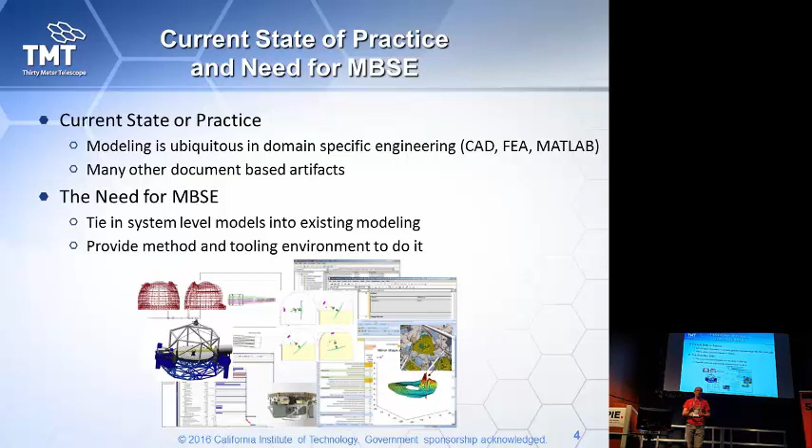Currently, and this has been going on for some years, on the discipline side we have models everywhere, all over the place, for CAD, FEA, MATLAB, and other tools. But there's still a lot of documents around, a lot of artifacts which are often disconnected, very often also at the system engineering level. So what we want is MBSE to tie system level models into the existing models, to integrate them in terms of information, tooling, and to provide a method. We need two things: a method and a tooling environment. I believe we're on a good path on both sides.

The typical problem is that you have a lot of people producing a lot of information, often captured in documents, and you have this typical situation with implicit dependencies between these documents. When you look at two documents with two numbers, you wonder, are these the same numbers? Were they produced with the same tool, which version of the tool, which version of the model, which version of the data? Have they been verified? What are these numbers? That happens very often.

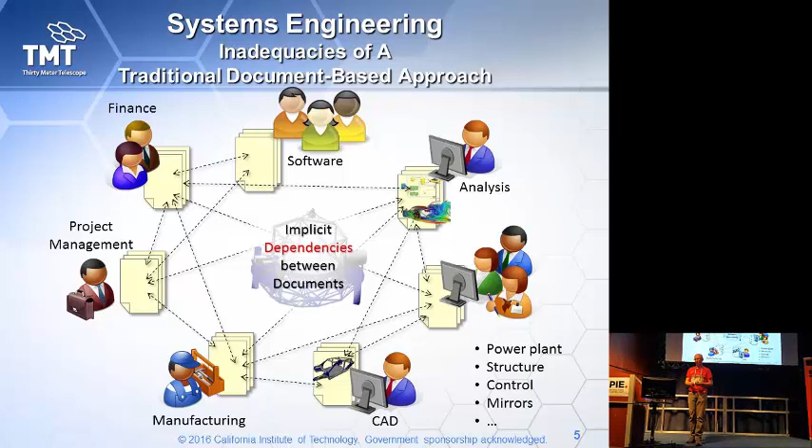So from a system engineering process point of view, as it's, for example, defined by the ISO 15288 standard, you would typically start as a system engineer to look at the stakeholder needs, to develop the requirements from them. You would come up with some architectural design based on some objective measures and requirements and functions. You do some trades and also some technical evaluation to come up with some logical architecture, synthesize this logical architecture or functional architecture into some physical architecture.

Now, that happens in one way or the other. It can be model-based, it can be document-based, but it happens. It can be only in your head, documented, undocumented, and so on. So we want to have more control over how this happens. So there, MBSE comes into being. Just as a reminder, MBSE is the formalized application of various modeling techniques, which should support the whole life cycle of system engineering. So analysis, verification, validation, design, architecture, and so on.

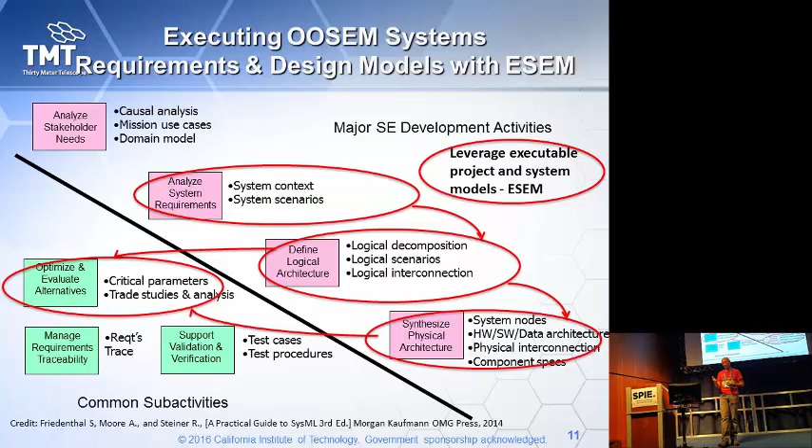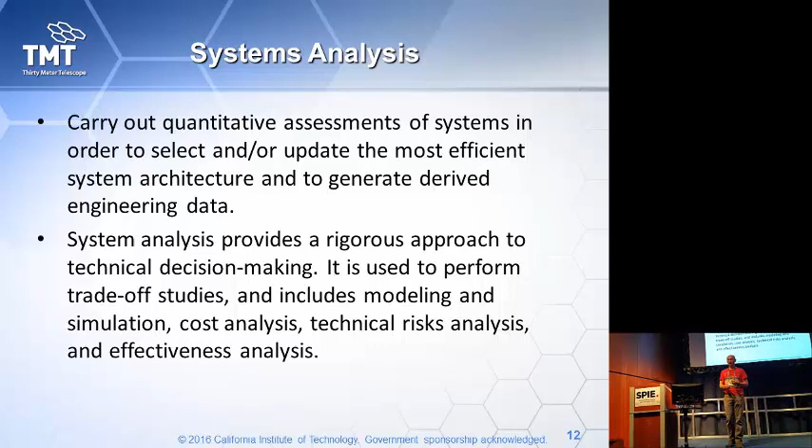So for the system analysis, we want to assess quantitatively the system architecture and design, and to provide some method for rigorous approach for decision making. So we'll do all the technical analysis using models and verify them against the requirements that we have. So in this case, we will have a conceptual model, a conceptual design, and a realization design, and we will verify if the design meets the requirements that we have.

So now today, and for the last years, SysML models in particular, the focus was on the syntax and the notation, so it was a little better Visio. Still, in the end, the diagrams were mostly consistent, but there was not so much emphasis on semantics. Now, moving to executable models, the picture changes completely. So you have a different modeling experience, because suddenly you have to be more rigorous and care about the things to make it executable, to simulate, to analyze, to have well-defined semantics. And in particular, on the side of behavior. So most of the things I will show today are around the behavioral description of your system architecture, embedded in some structure.

So the proposed approach is to use executable models in order to enhance the understanding of our system, to verify the requirements, and to increase the precision. And we introduce an engineering method which we call ESEM, the Executable System Engineering Method, which augments the OOSEM method by applying various patterns which are documented in this paper and in other papers. I will not go in this talk into all the details, because there are a lot of details on how to construct such a model, how to validate it, how to execute it, and so on. So I will show the highlights, and then if you are still interested, you can look at the papers or talk to me for further details.

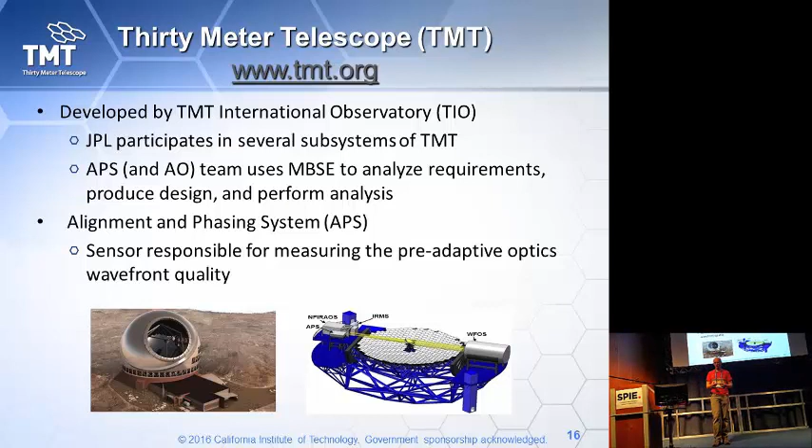So the objectives for the TMT are to have an executable system model to capture the requirements, the operation scenarios, the operation use cases, to capture the composition of the system functionally and physically, the relations between the subsystems, and the interfaces. Right? And we have to analyze the system design with respect to some requirements, which are the requirements on mass, power consumption, and duration. So certain scenarios are limited in time, like segment exchange should not take more than 2 hours, and we have to demonstrate that our functional design meets this requirement.

Several documents are produced out of the model directly, so they are auto-generated documents, and they are the requirements flow down, the operation scenarios, the design description, the detailed design description, and the ICDs, the interface control documents. The other goal was to use as much as possible vanilla SysML, standard languages, and to avoid custom software development. So we use off-the-shelf tools without scripting, plugins, or whatever. So really off-the-shelf things.

So what we do is to capture the operational scenarios with their estimated time, the estimation that we consider adequate, and you would have something like a 2-hour requirement for the post-segment exchange alignment, and the current best estimate that comes out of our model is 1 hour 19 minutes. And we verify this requirement automatically within our process. Then we also capture the characterizations of the components in terms of power and mass in order to do power and mass roll-ups, static and dynamic, in order to verify the requirements on those constraints.

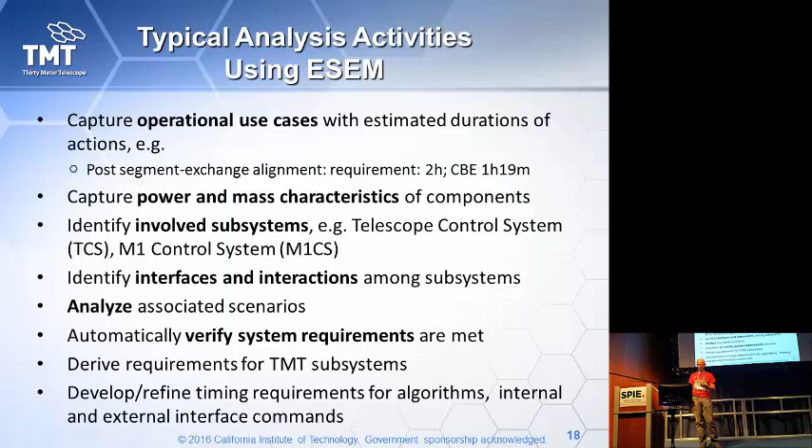So one typical scenario is that we have some requirement on time and power, for example. So like 2 hours, and we have a certain exposure time and some maximum power consumption, and a number of motors. So a typical change scenario would be if you change something on either side. So either you change the requirement, and you still want to verify if the design holds against those requirements, or you change something on the design side and want to see if that still meets the requirements.

So what happens is if this requirement changes, the TMT project uses a DOORS database to manage the requirements, DOORS 9 database. We import periodically requirements into our SysML model in MagicDraw. We formalize these requirements into SysML constraints. So they're not just text, but all the things that are textually captured in the requirement are converted into model elements, so we can trace and verify and flow them down in our model. So that happens here. We then do an analysis of our conceptual and/or the realization design. So we run a certain scenario, get the total time, or we do a dynamic power rollup for a certain operational scenario and determine the peak power.

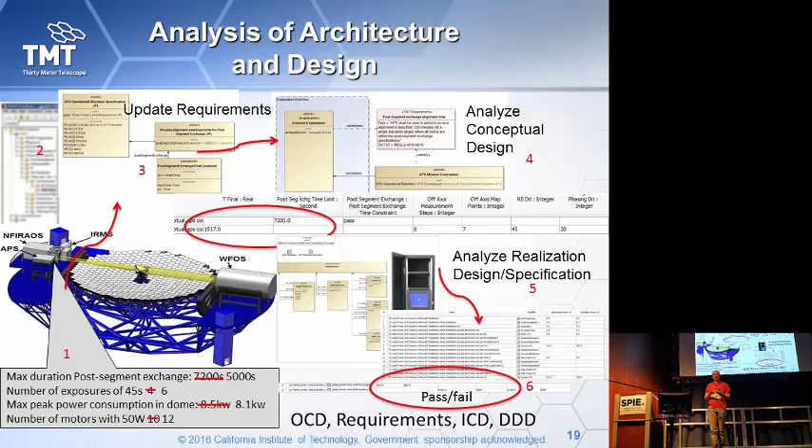So what that leads you to is that you have a lot of information floating around from different domains. So there is the part of the system architecture, you have requirements, you have application lifecycle models, you have PLMs, you have the mechanical, the electronic, power, project management. All over the place there is some information. So in the end you will have some information, some graph which defines the dependencies between your information.

So here I will start with a video which takes a couple of minutes, which will show several things. It will show part of our infrastructure, which is a web-based interface to our model management system, which is called MMS. So it's a lightweight web client which allows you to view your model as a document. So basically this is the document that in the end you get as a PDF. But at the same time it allows you to change a lot of things in this document-based view. So text obviously, but also values.

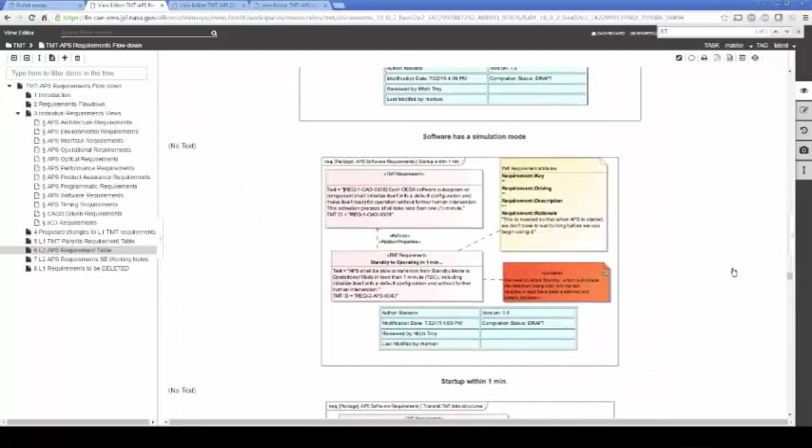I hope this starts. So what you see is like a tree of, so that's one document, like all the use cases. You see requirements views, these are all the requirements that we have, which are generated from the model, different diagrams. You see the structure of the document on the left-hand side. So that's one document, like the requirements flow down.

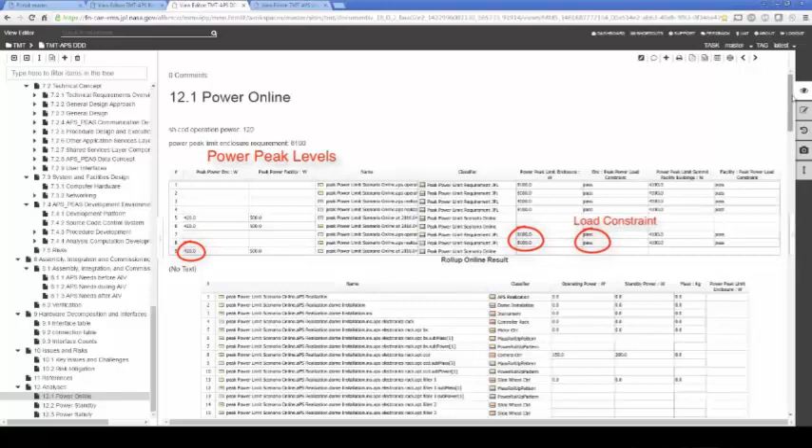You see tables for the analysis, like the current time estimates for particular operation scenarios, the constraint plus the current best estimates. You see similar things for the power. The video is a little bit too fast, but you can watch it afterwards.

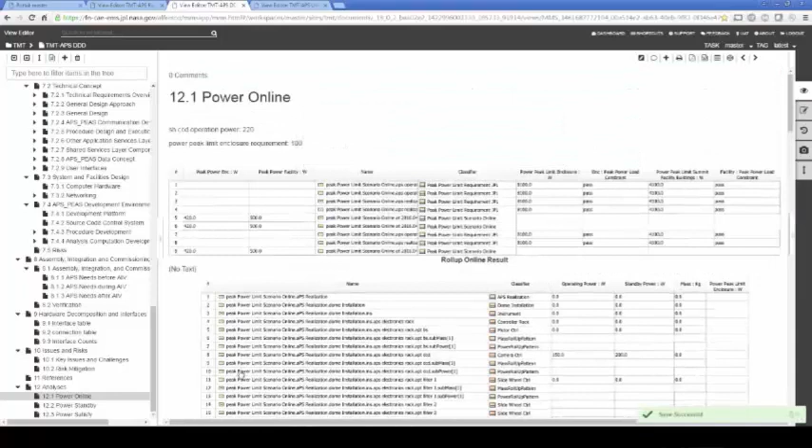You can change the values. You will change the value in the client. So now you have a new value. You change the requirement and/or design value, the power value and the required value. So that will be saved in the repository. Then on the rich client platform, we will update from the repository into the client. So you see the update happened here. It took the two new values.

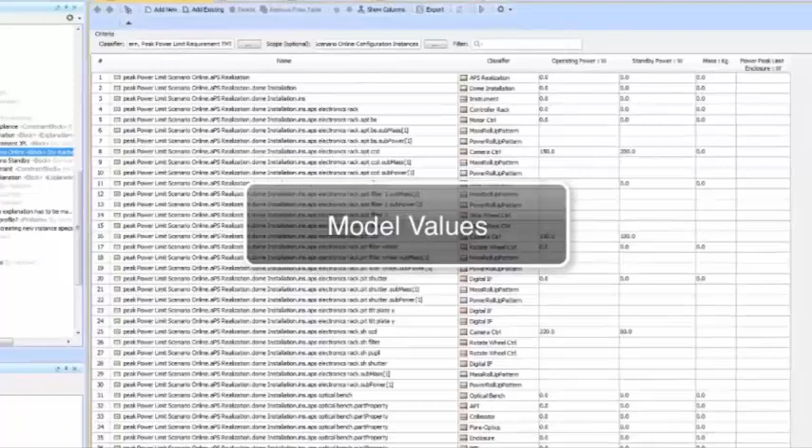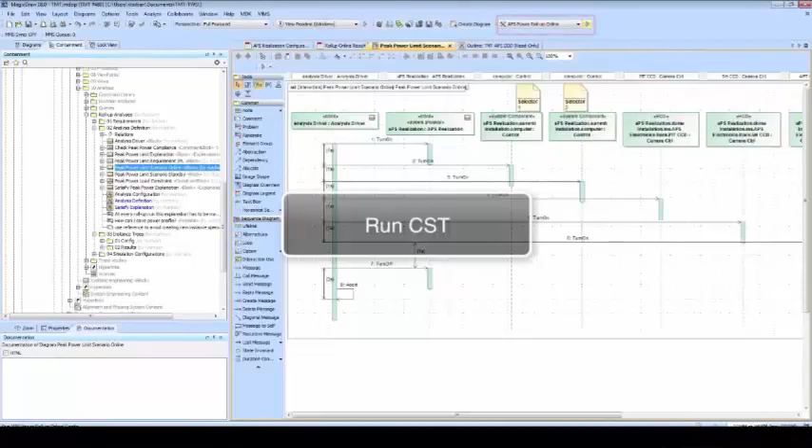And then we would run using the Cameo Simulation Toolkit. So we have a table where we see the values that have changed. Then we would use a tool, which is Cameo Simulation Toolkit, to execute the model. So it's a SysML model which is fully executable to run a particular analysis according to a particular scenario, which you see here expressed as a SysML sequence diagram.

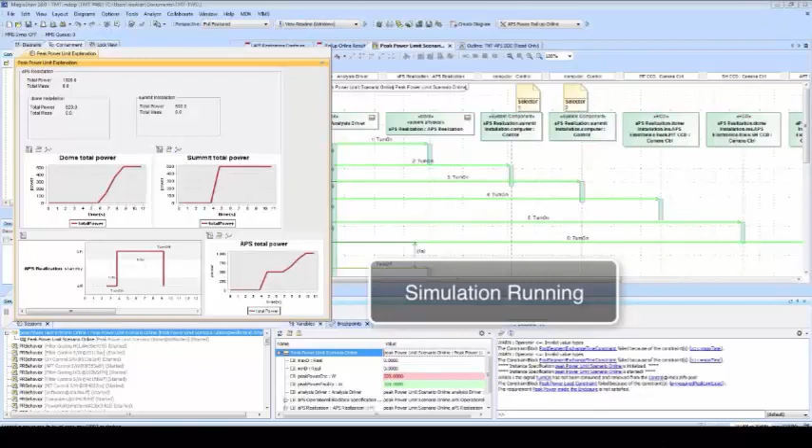You get some plots which show, in this case, the power consumption at two locations, one in the dome and one in the computer room, and the total. And the simulation would record the maximum over time and then verify at the end, very briefly here, against the requirement. It will tell you pass-fail. And then the tables will be automatically updated, and you can publish them again to the document, and the document would have the results of your latest analysis.

So what we use for that as an integrating platform is something we call OpenMBEE, a model-based engineering environment. The good thing about that is that we have been able at JPL, with some effort, to open source almost a complete platform for system engineering. OpenMBEE is the integrating part of something bigger, which is OpenCAE, which involves all the ECAD, MCAD, and PLM.

Architecture. So we have this, I mentioned these two clients already. MagicDraw is one client. There's another one. We have a third, meanwhile, which is Tom Sawyer, which is a very sophisticated automated layout tool. The model repository addresses the following concerns. So it provides some infrastructure for versioning. So we have element level version control, the workflows, access control, so who can see what, read, write, access, and so on.

You can basically put whatever you like, from documents, screenshots, to SysML models, but everything will be represented as a model element in our model, and you can create the relationships. You have some platform, which is the engineering view model platform, on top of which the view editor, for example, is built, but you can build on top other views that you want, not only a document one.

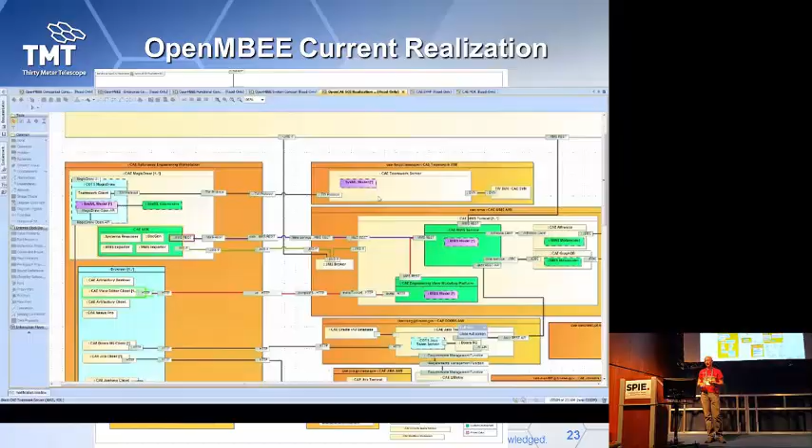So we have a SysML model, which is also generated and also executes to simulate the different workflows that we have. You would see something like we have MagicDraw on this side, which is a build of the commercial off-the-shelf tool plus our customization for the integration with our model repository, which is generic on this side, the integration with DOORS NG, where we have built an integration. We are now at the moment integrating Jira into our repository, so we can combine Jira tickets. We will automatically create a branch. We will be able to track model elements with respect to a certain Jira ticket as an issue tracker. So we're working on all that.

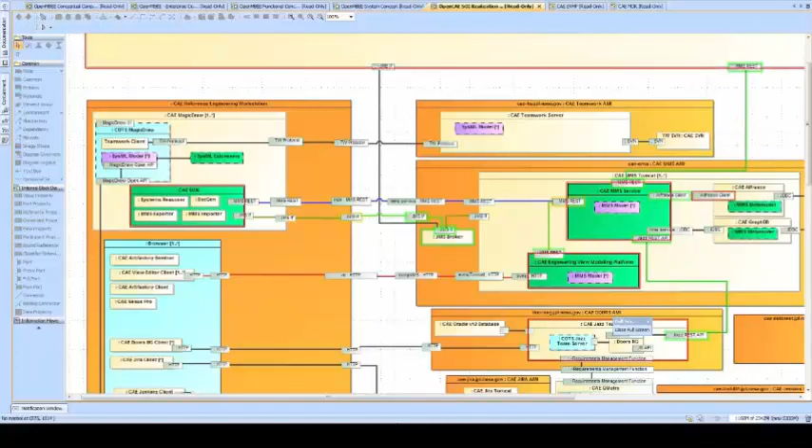Now, I'm very interested. So at the moment we have the system level simulation, which is mostly SysML. But over the last few years, the FMI, the Functional Mockup Interface standard, has gained a lot of popularity in industry for co-simulation. So you would have the architectural model like SysML as the hub, but then you would delegate or outsource all the analysis, particular analysis, to various tools. It would not be in the SysML model.

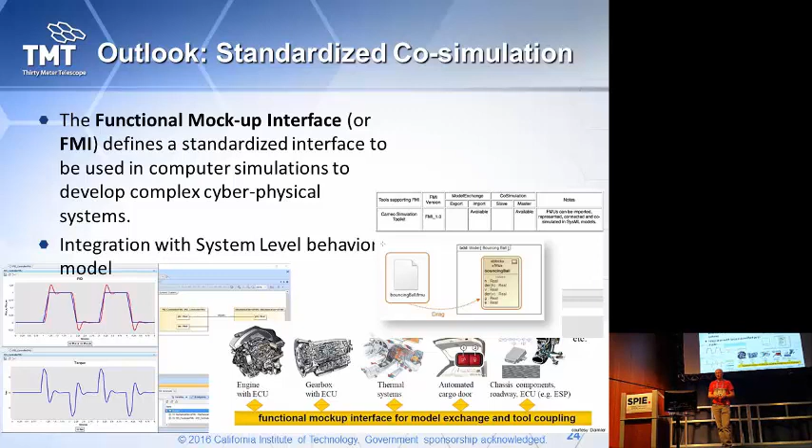So at the moment there are more than 80 tools already supported, which provide an integration through FMI and SysML. So the simulation toolkit that we use provides a framework where you can hook in different parts. It's not a closed system, but actually it's an open system where you can add your own simulation platform for analysis tools, and it's widely supported, and it's very, very impressive.

So, as a summary, most of you probably know that they're all over the place, and they are mostly connected through documents, and still a lot of information is only documents, and it's not very well connected with respect to the other information in models or in other documents. We have integration between requirements and the behavioral model and the performance of this design, which we can verify and analyze. We have some method which describes how to construct such an executable model in order to carry out these simulations and analysis.

We leverage executability using OOSEM, ESEM, co-simulation in the future with FMI, but also co-analysis is supposed to be. For example, we have something which is a behavior analysis engine, which is a generic engine which allows you to plug in different analysis tools as well. And then you will be able to, for example, hand over an equation system that comes from the system model, and it would solve it for you, or some scheduling.

For example, if you want to start up your system and you have some constraints like the maximum power consumption should be this, what's the optimal schedule to start up this motor first with respect to the other motor, or whatever you want to do, and work out the schedule. So that infrastructure we have. We have the automated requirements verification of the architecture, as I showed a little bit before. So you have the requirements in your system model, and you analyze them with the simulation or with some other analysis tools to verify if the conceptual architecture meets the requirements.